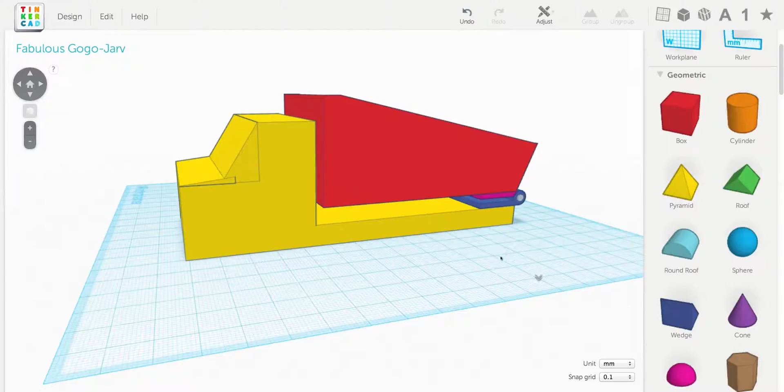All right, time to add the wheels and axles to our truck and finish it off. First thing I'm going to do is raise the entire assembly up so we can get under it.

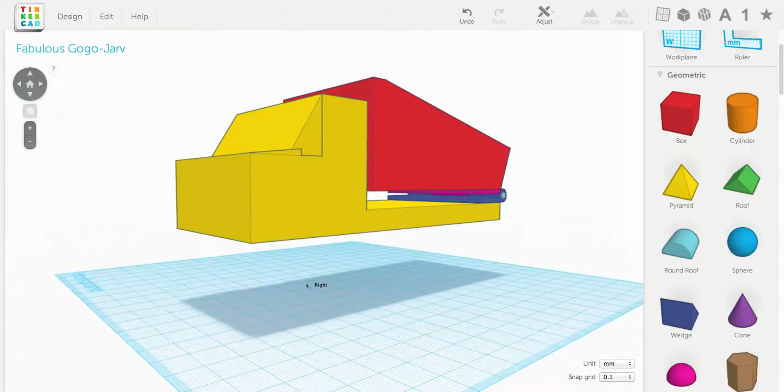Now, the axles need to be the thing that connects them, which are just like these pins. So I'm going to ungroup this and copy this pin out.

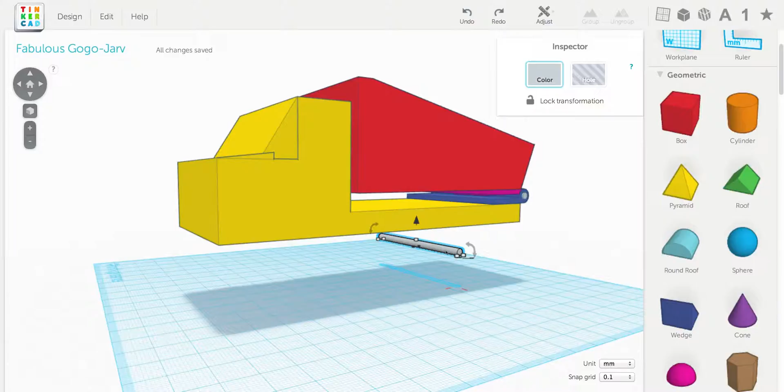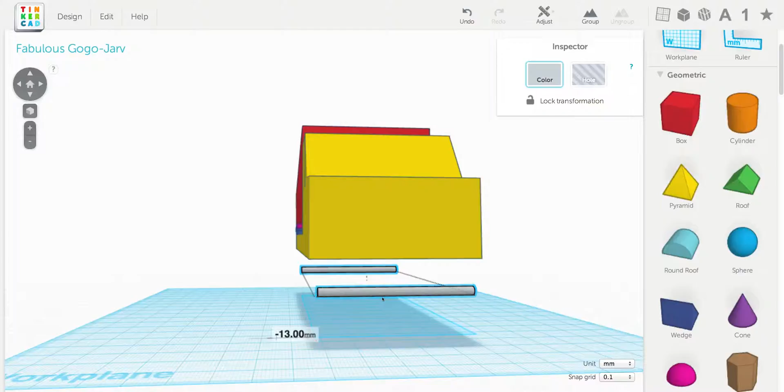So we're going to have some axles like this down here, and the wheels are going to be attached to these axles. The axles need to be attached to the truck. How do we do that?

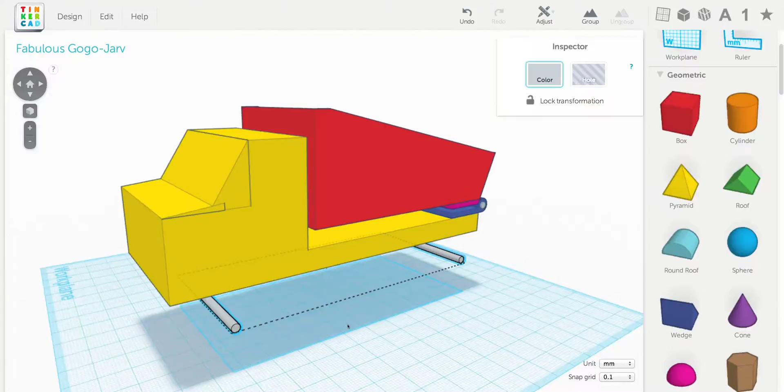Remember, this is going to be a real world thing. It's going to be put together, so we have to think about how we're actually going to assemble this. Well, here's one of the designs used in situations like this to hold the axles.

Oops, excuse me. You can add shapes. We've seen how to import other models that we've created in Tinkercad, but there's something else you can do: you can import 2D shapes that are in a certain format.

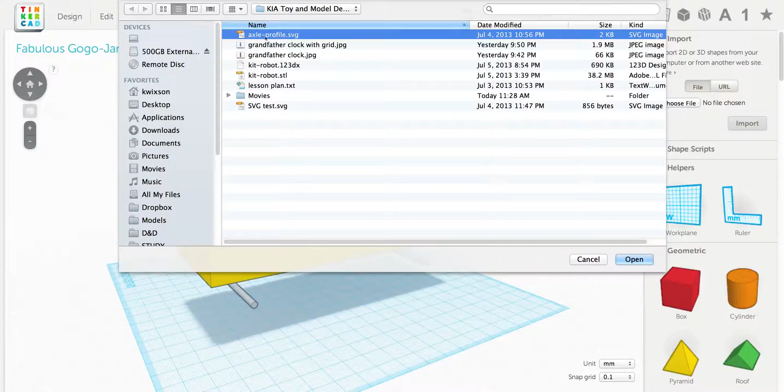So in the folder where all these movies are is a file called axle-profile.svg. And when I import that, you can see we have kind of a complex shape that pops out here.

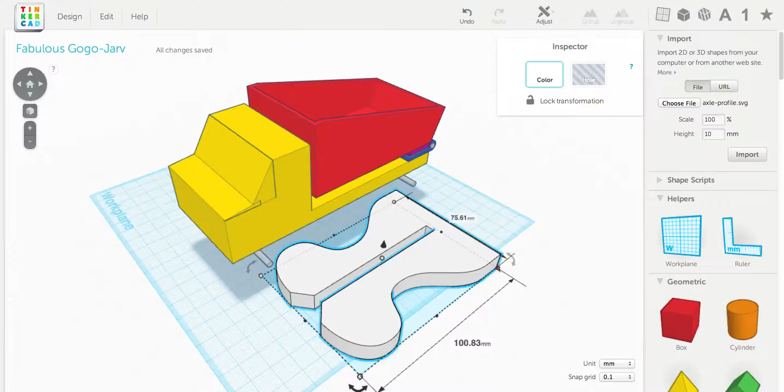Of course, this is way too big, so I'm going to hold Shift, drag for a uniform scale, make it a lot smaller. It should be 16 millimeters wide or thereabouts.

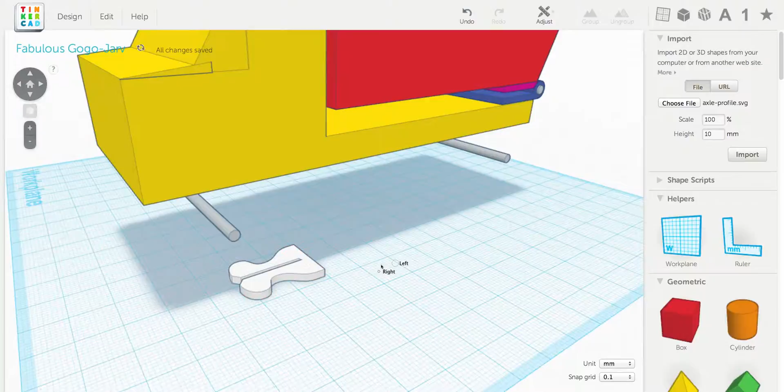Rotate it 90 degrees that way, and then 90 degrees that way. Also should be wider than that, so I'm going to make it, let's say, 6 millimeters wide.

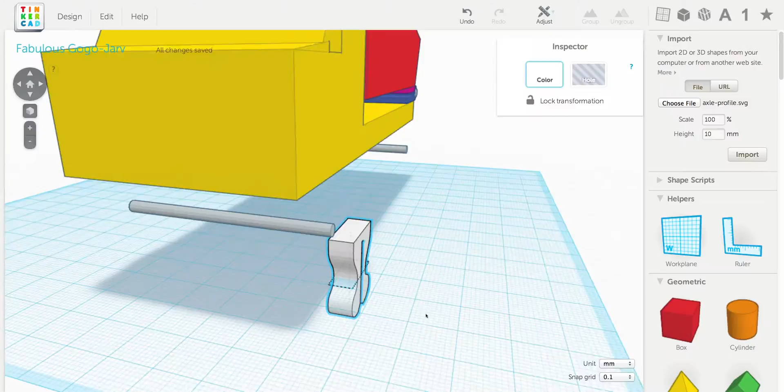Now I'll position this up against the bottom of the truck like that. And that's looking too big to me still, so I'm going to shrink it down even more.

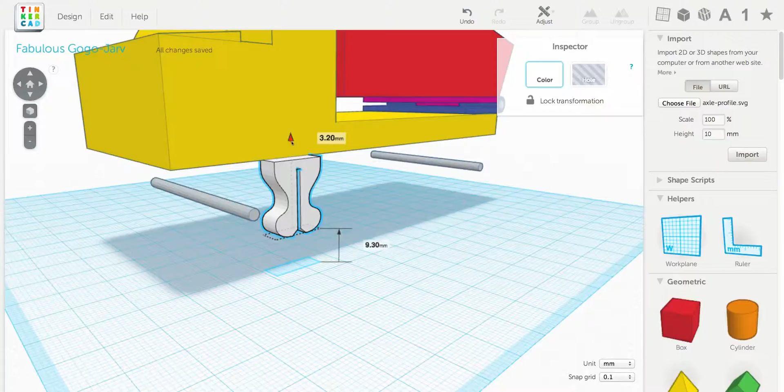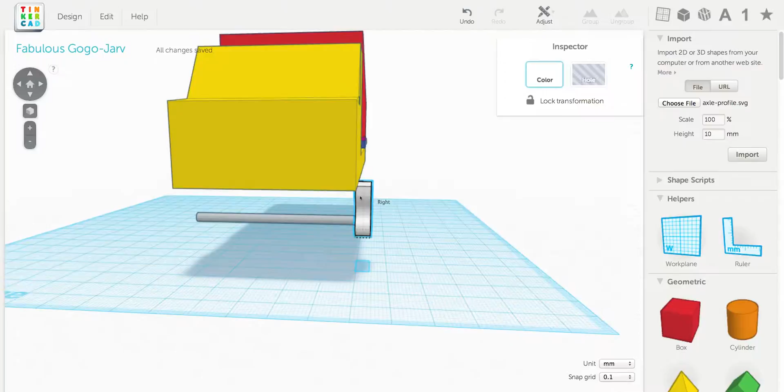All right, just give it an eyeball. Should look like that. Going to align all of this stuff on the edge, except not the hinge - well, not that pin in the hinge, right?

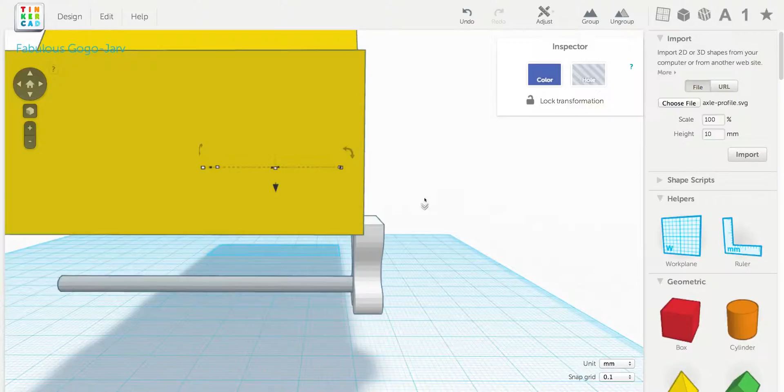So everything else, just not that pin back there. Good, all lined up.

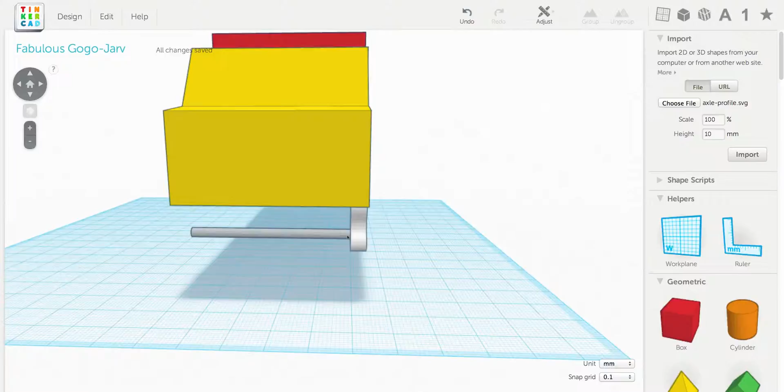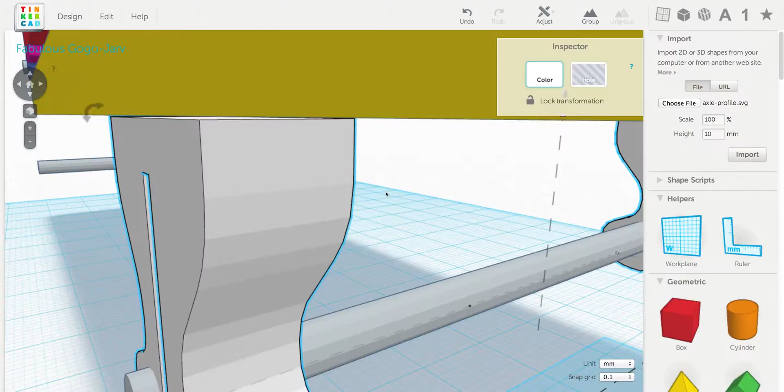Let me duplicate that one and shift drag it over here to this side. And if I need to, nudge it. Looks like I need to nudge it up a little bit, otherwise I'm going to have a gap. There we are.

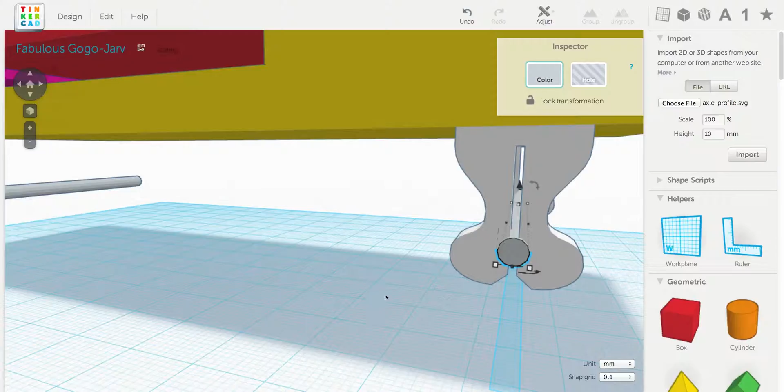Using the down arrow key, I can move an object closer to me, or with the up arrow key, further away. But then I turn over to the side and it's the left and right keyboard arrow keys. Awesome.

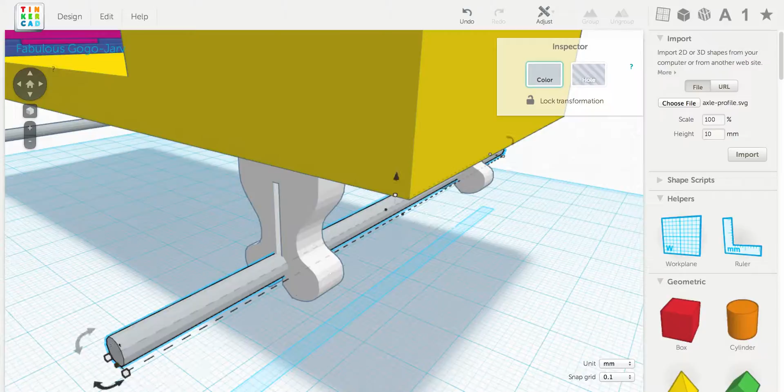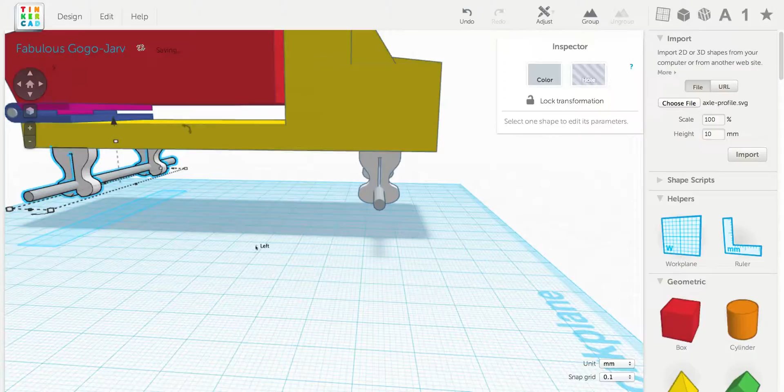I'm going to make this axle longer, a lot longer, because we want to stick it out into the wheels. Get rid of this one in the back and just select the axle and two of the axle supports. Duplicate all three of those at once and shift drag it to the back of the truck. So there I have the axles on the truck.

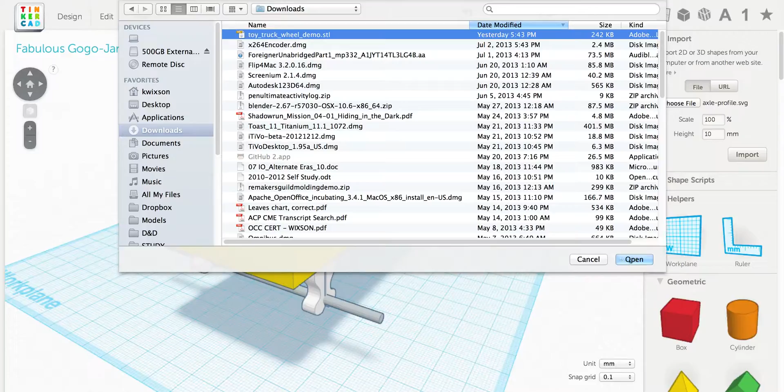Now we just need the wheels. So we're going to return to our import, and if you still have the truck wheel in your downloads folder, that's where you want to grab it, and then import that.

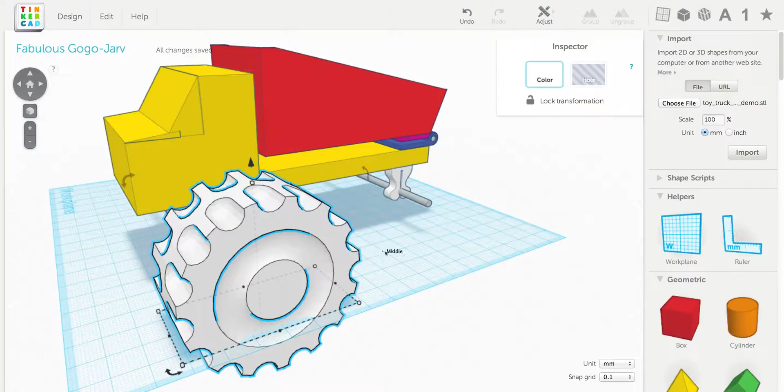Much too large for this truck, although it looks cool. Probably should scale it down. And then it's time to nudge it until it is located in the middle.

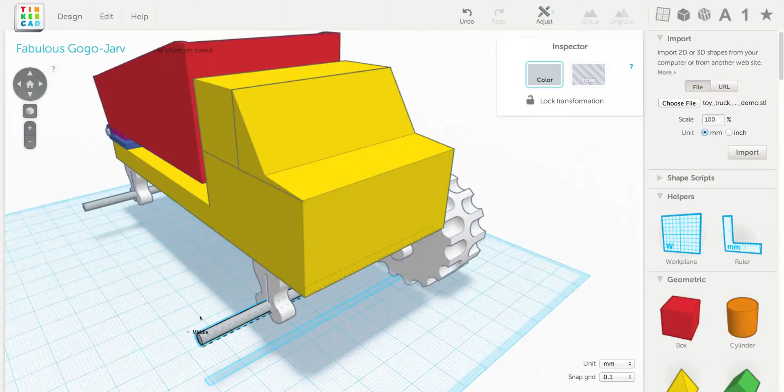If your axles aren't wide enough that they're not sticking out of the end of the wheel, then you'll need to make them longer. There we go. So now I can nudge around until it's lined up in the middle.

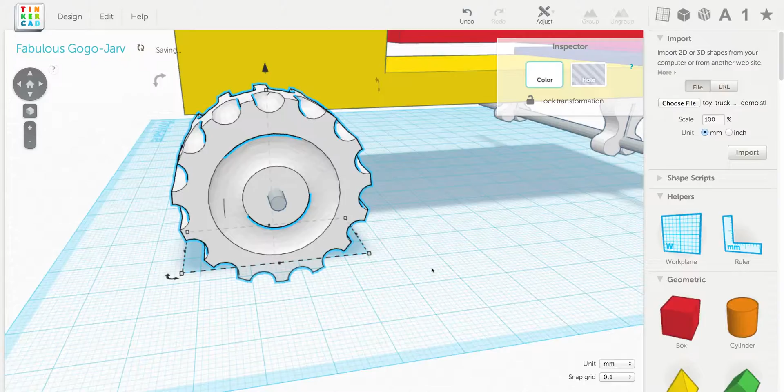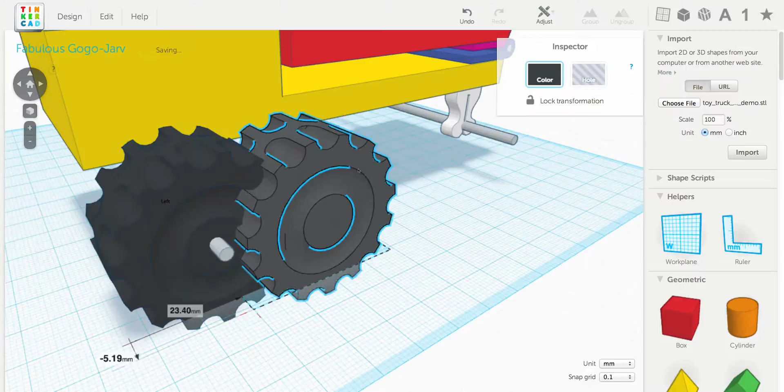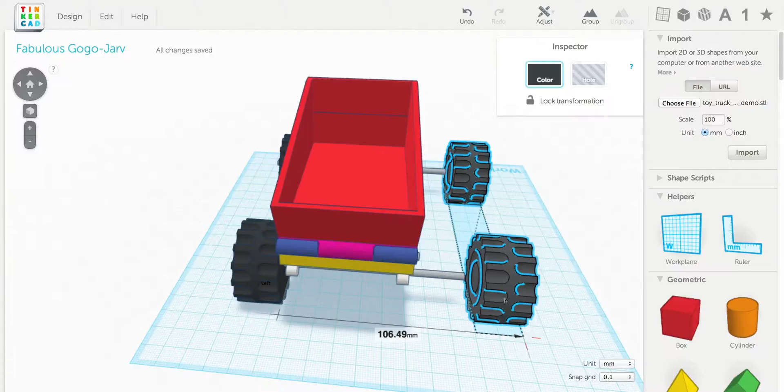Change the color of the wheel to black, the way it should be. And then duplicate that wheel and shift drag it down to the other axle, which also needs to be longer. Duplicate both those wheels at once and shift drag them over to the other side.

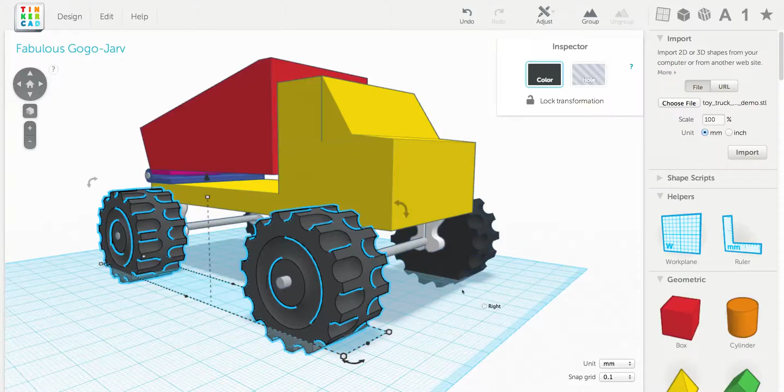Now they're inside out, and so I'll need to rotate by 180 degrees. Now it's important these axles and the wheels are lined up exactly, so I'm going to select all three of those and do an alignment.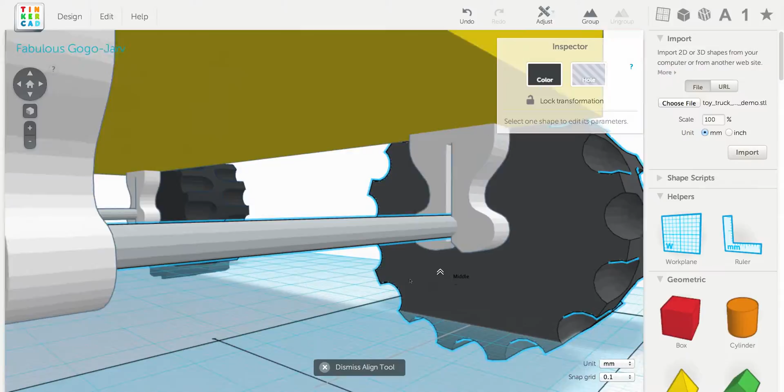And we'll make sure the axle is just inside this notch, and sure enough it is, and that looks pretty well centered inside of the axle brackets.

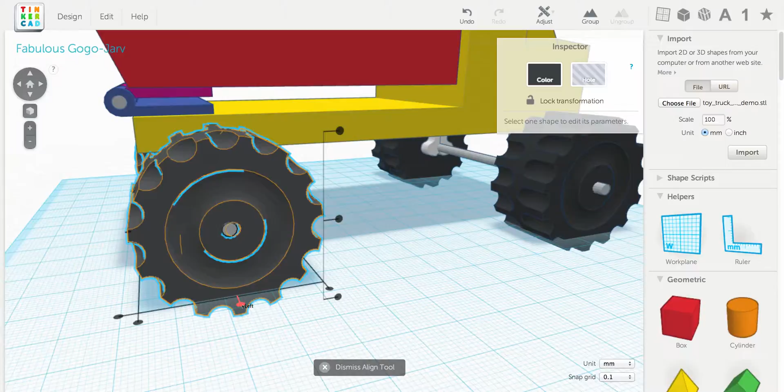It's time to do that to the back. So I'm going to align, and then position it in relation to the brackets. So use nudge to get it all centered up and squared away.

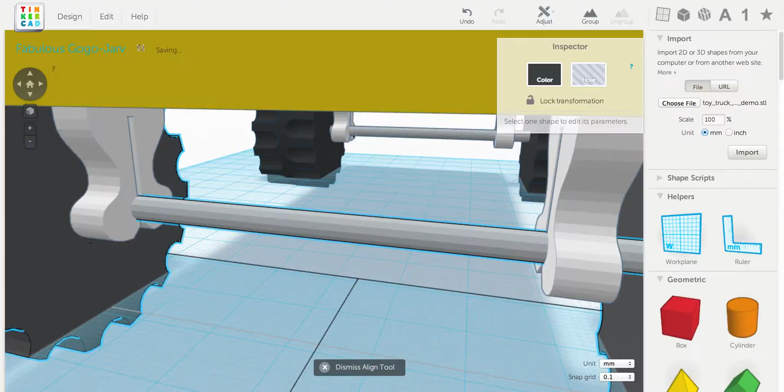And hey, what do you know? We have a truck. One last detail though: see how this hangs up here? It's just hanging over the bed without anything to support it.

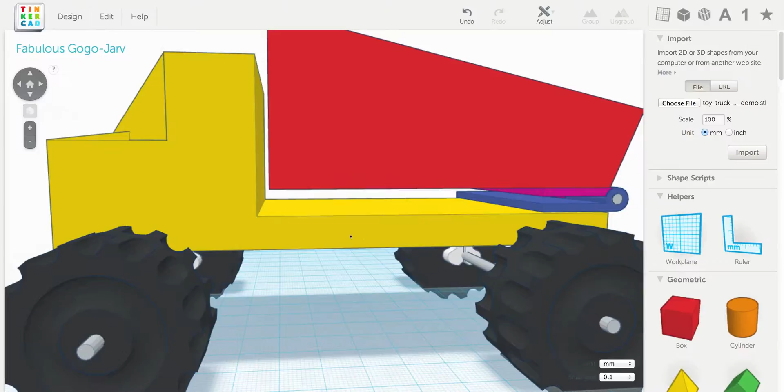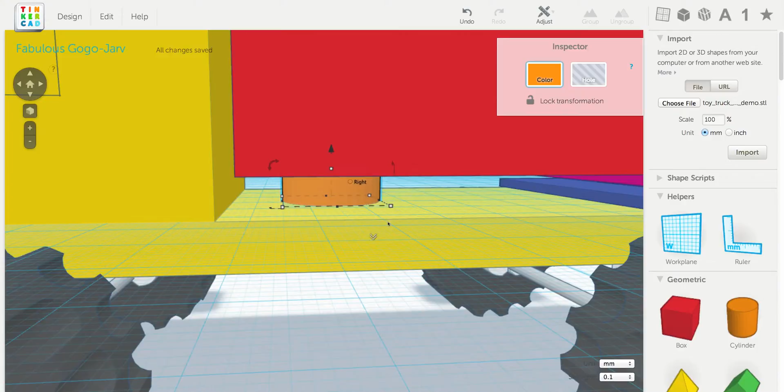So we should put some sort of support in there. I'm going to add a work plane in there and just throw in a cylinder, and make it short so that it's just under the bed, or just under the bucket, I should say. And there, let's group that, after aligning it.

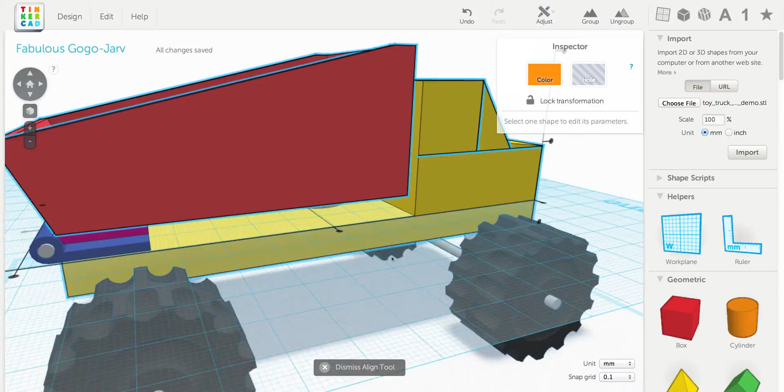Turn them all yellow. And congratulations, it's done. We have a toy dump truck.

So dump trucks aren't the only things to make. You can make a monster truck. You could put wheel wells and other cool stuff on your truck. Trick it out, make your perfect moving, drivable toy. So have fun with that, experiment, play around, and we'll see you back here for another project shortly.